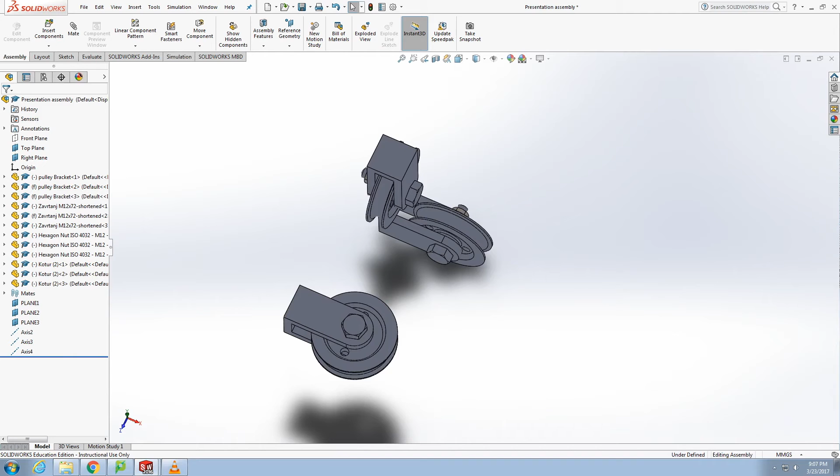This is the assembly so far: 3 pulleys set up in 3 planes. They are already aligned, but to align them, just make sure the grooves where the rope passes line up between the pulleys. To start to make a guideline for the path of the rope, click Insert Component, New Component, then

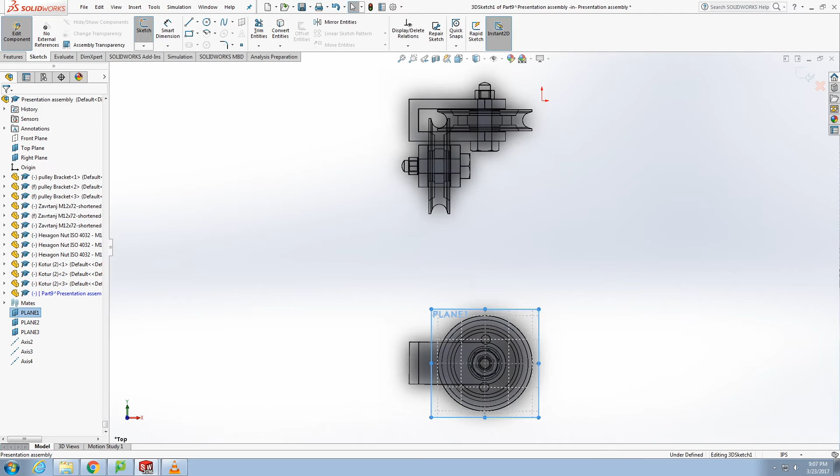select a plane. We're going to change the sketch to a 3D sketch because it's going to be a 3D guide. I already have planes set up in the center of all the pulleys. So we're going to start by drawing a circle and make the radius 48 millimeters, which will make the circumference the length of the center line down the groove of the pulley.

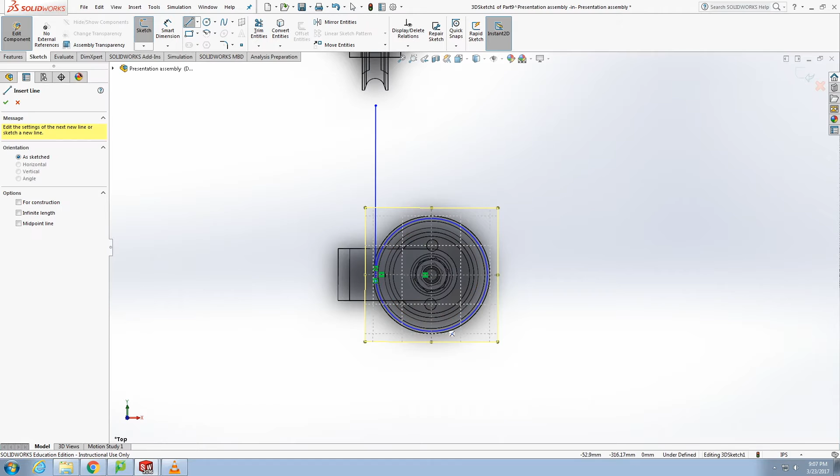Next, draw some tangent lines off the appropriate edges of the circle. Flip views and select the next plane. We're just going to repeat the steps for the 3 pulleys. When drawing the tangent lines, it doesn't really matter if they meet up because we are just using them as a guide for the rope.

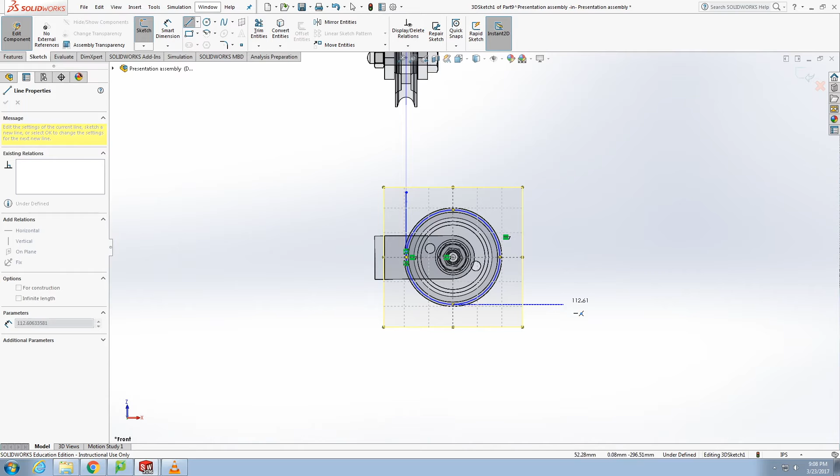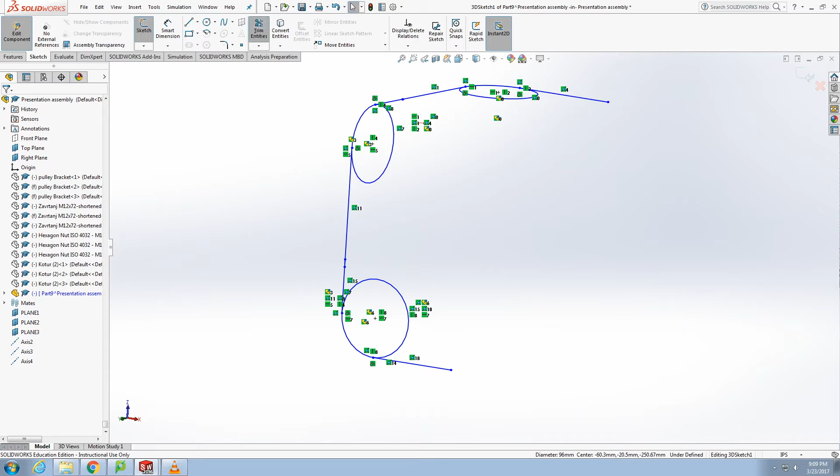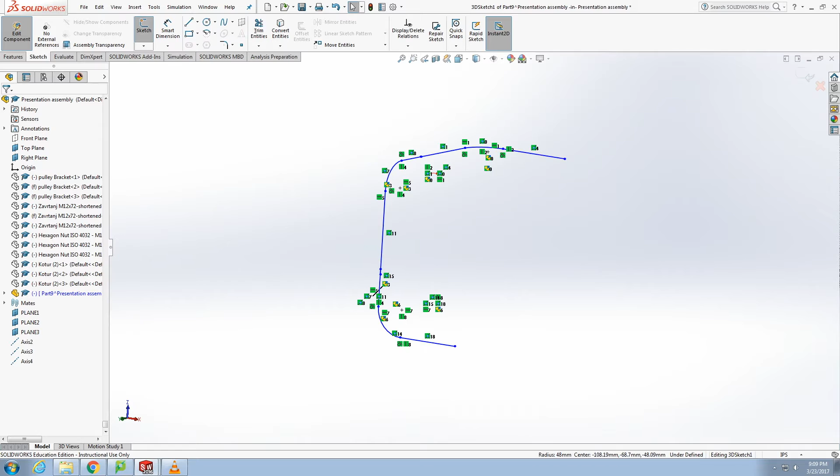Now that we're done drawing all the lines, we're going to hide the pulleys to make it easier to trim. Trim off the extra circular area that does not follow the path of the rope. Lastly, just set all the lines to construction lines.

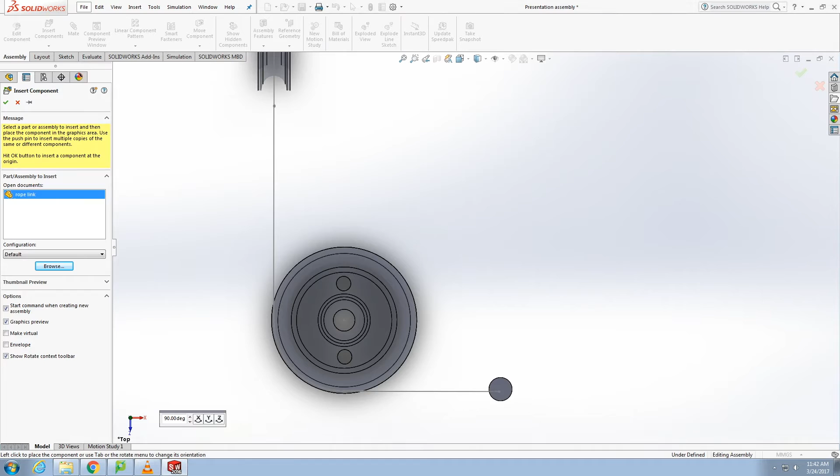Because we want to make a dynamic rope, we need to make the rope out of links. So we're going to insert component, browse for the link component, and put that on the end of the guide. Although not shown, the construction line has been fixed. We're going to mate the vertex of the link coincident with the construction line, and then make the cylinder of the link parallel with that line.

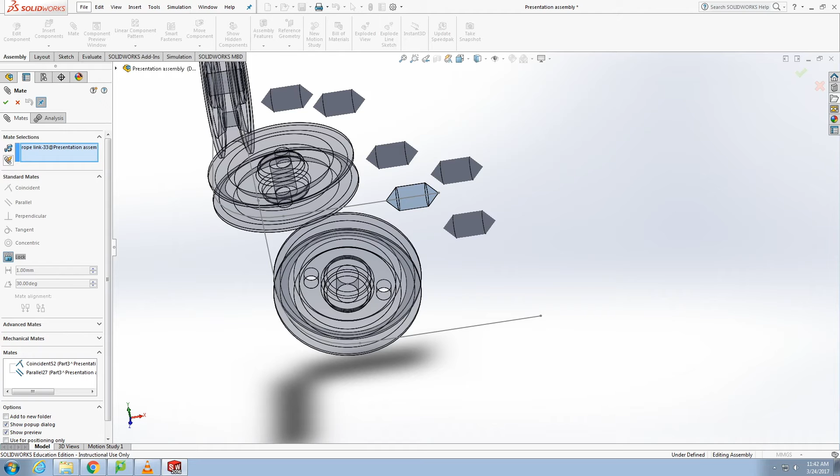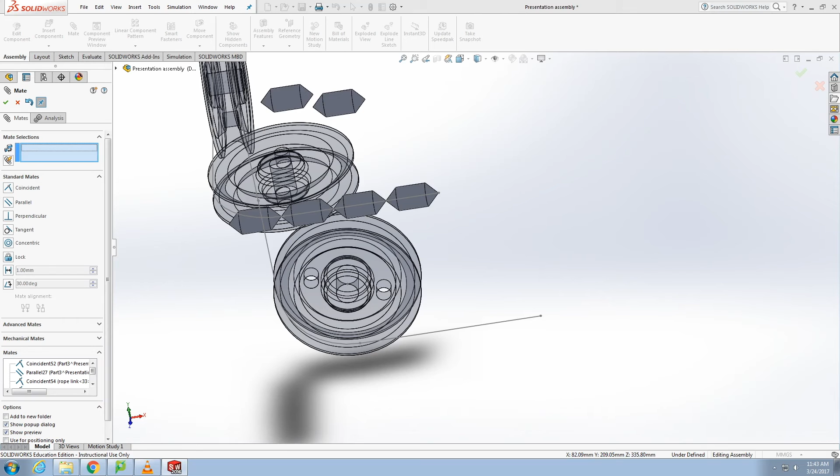Select the link to copy it, and then just paste a bunch into the assembly. The vertices between links are coincident again, and we're going to do this for as many links as it takes to follow the length of that guide path. To try and arrange the links around the path, continually fix and float them while moving other links in the right orientation.

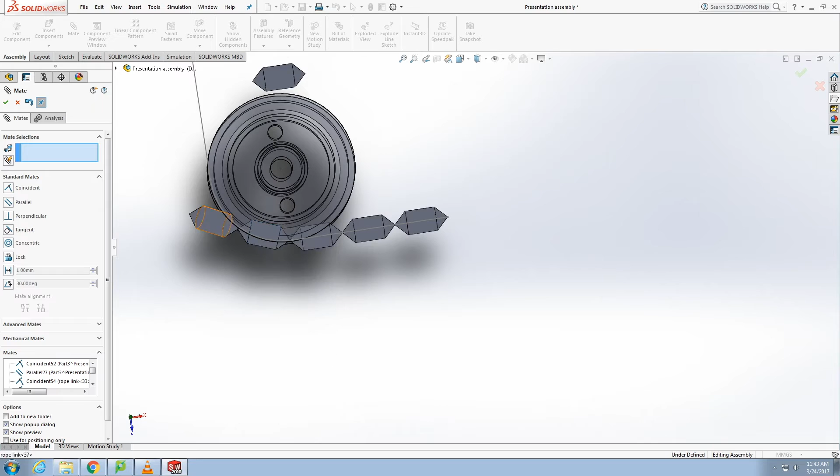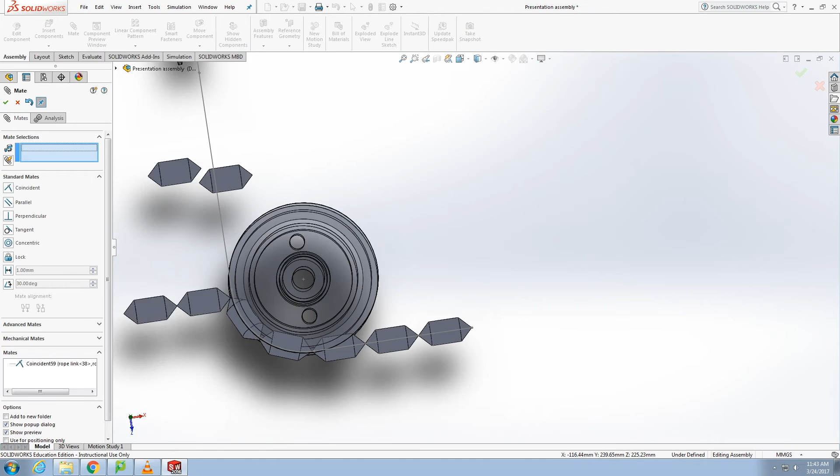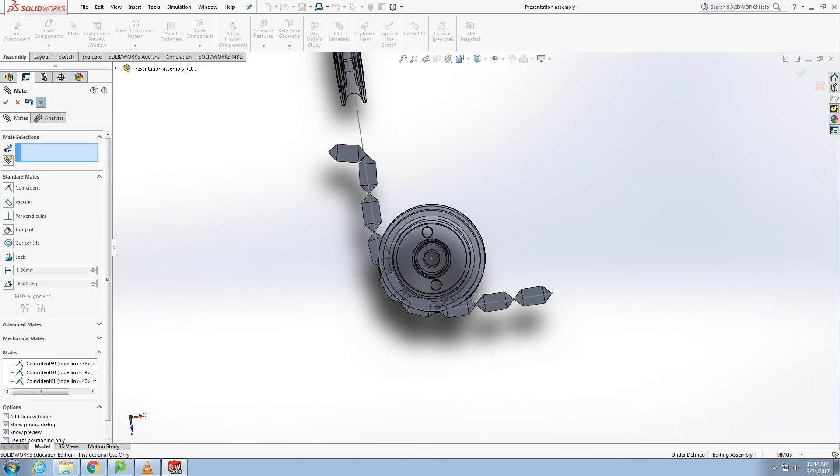Now we add a bunch more links into the assembly and assemble them in the same way to finish the length of that portion of the path. As you can see, it does not have to be perfect. Make sure none of the links are fixed before starting the mates with the pulley.

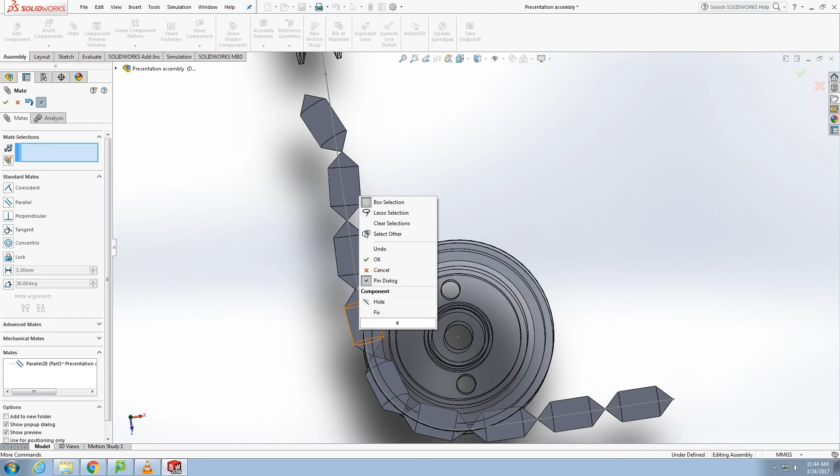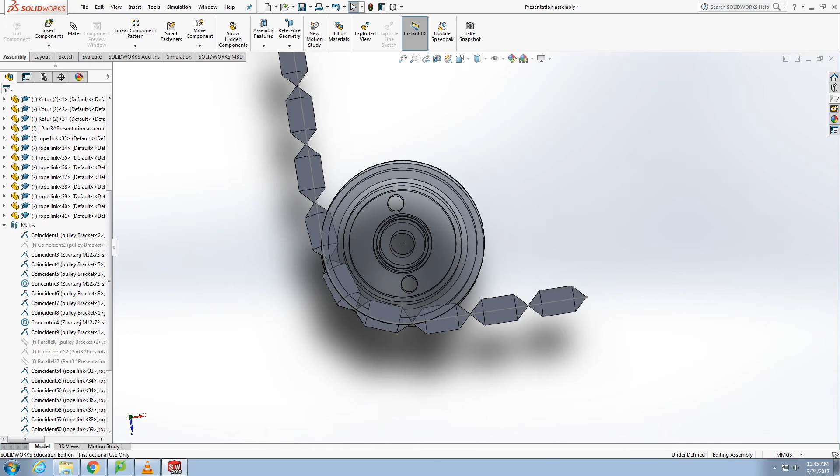To start, we're going to make the links that will remain on the straight portions of the guide parallel with those portions. Do this for all the links that will remain straight. Fix the end link and delete that coincident mate with the guideline.

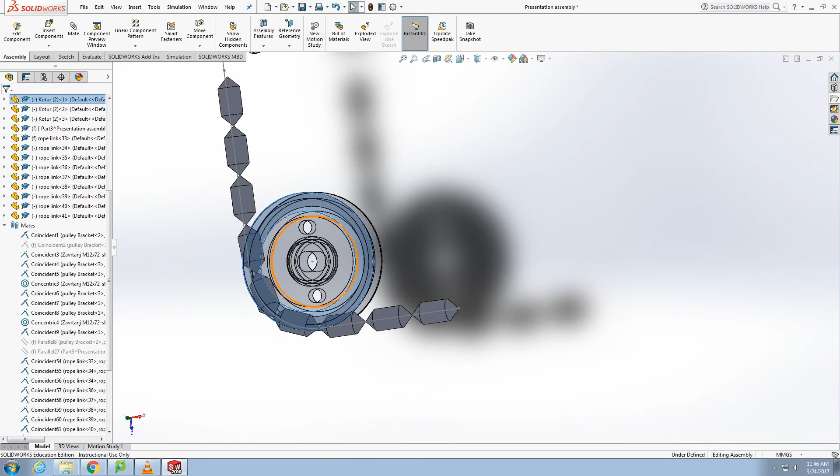Now we need to mate the links that go around the pulley with the pulley. To start, we're going to mate the cylindrical area of the links with that cylindrical area down the center of the pulley. We're going to mate it perpendicular and also add a distance between the two. It's going to be 32 millimeters, which is that 48 millimeter radius of the center line around the pulley groove minus half the width of the rope links minus half the width of that cylindrical component down the center of the pulley.

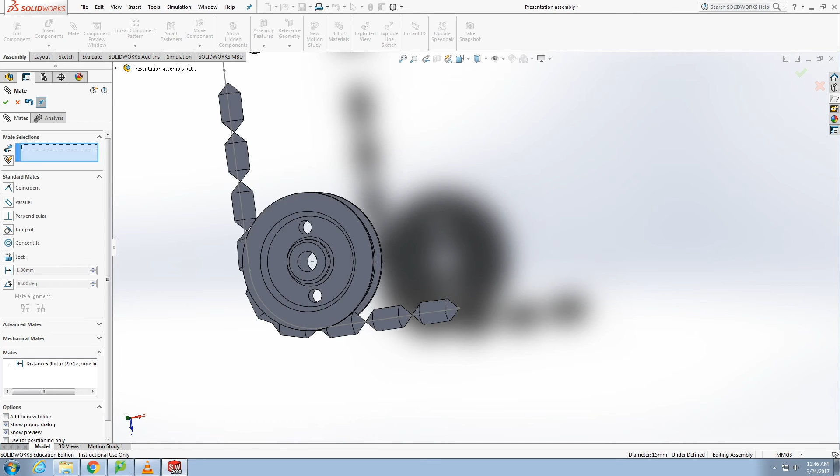Looking from the side, you can see that the links do not fully follow that guide path. It's an easy fix. We're just going to fix one of the links that is on the path. It's going to over-define it, but don't worry because it's only temporary. Then move the links onto the path and then float it again.

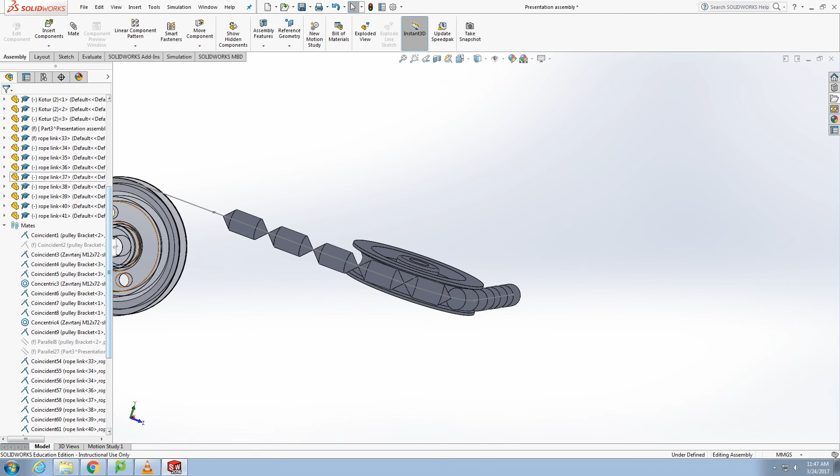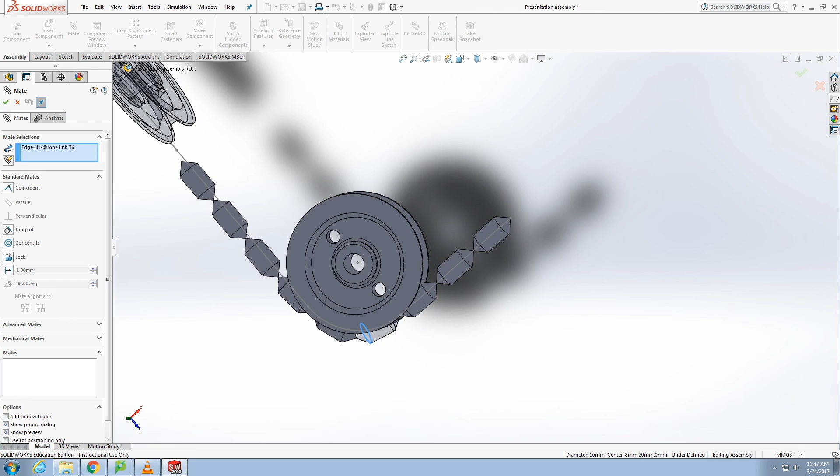The next thing we need to do is create a mate to pair the movement of the rope with the movement of the pulley. So we're going to select one of the edges that is going to be constantly in contact with the groove of the pulley, and then we're just going to lock it to that groove. This is also going to over-define it, so we just need to go back through the mates and delete the other mates that are associated with that link in the pulley.

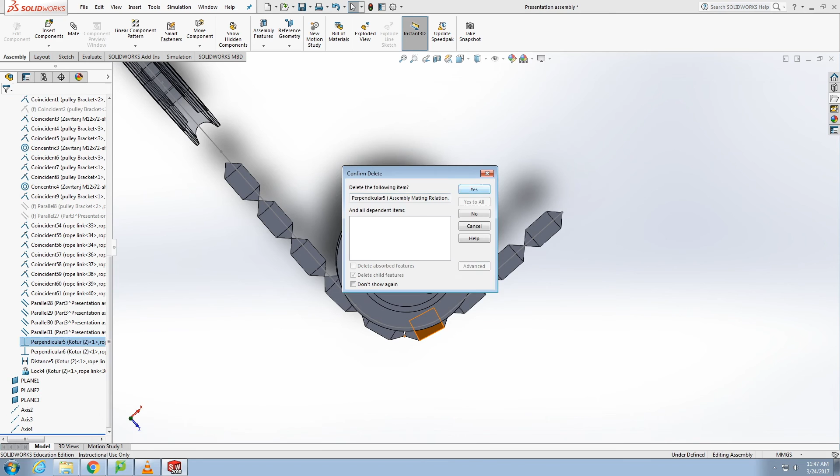So after deleting that second mate, some more problems arise. So after giving a quick scan through the mates that aren't working, we realize that we just need to float that end link that we fixed previously. Now you should be good to go, so gently pulling on either end will rotate the pulley as well as move that dynamic rope around it.

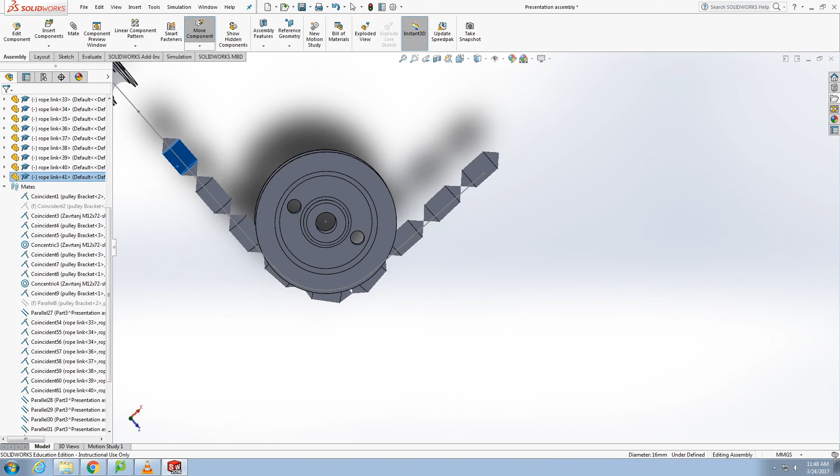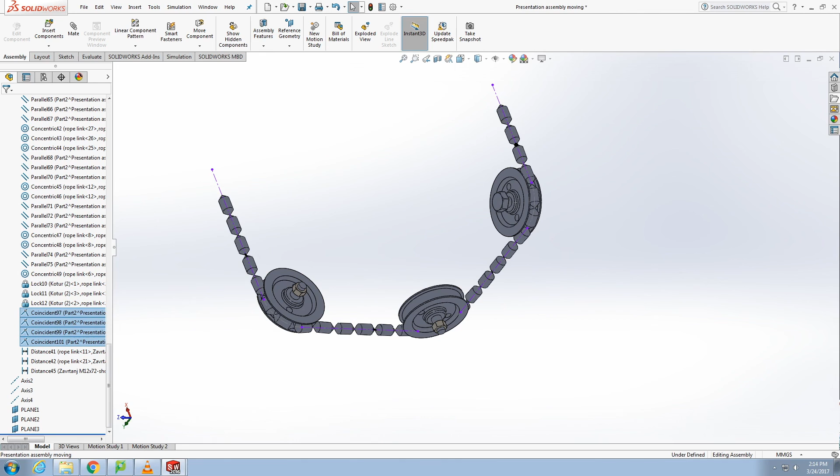So after adding all the mates to link up the 3 pulleys in the assembly, I'll show you the mates that worked for creating this dynamic rope system. So these are links locked to the pulleys. The next 4 mates in the list are coincident mates between vertices of links on the straight portions of the guide and the guideline to keep their motion on the line.

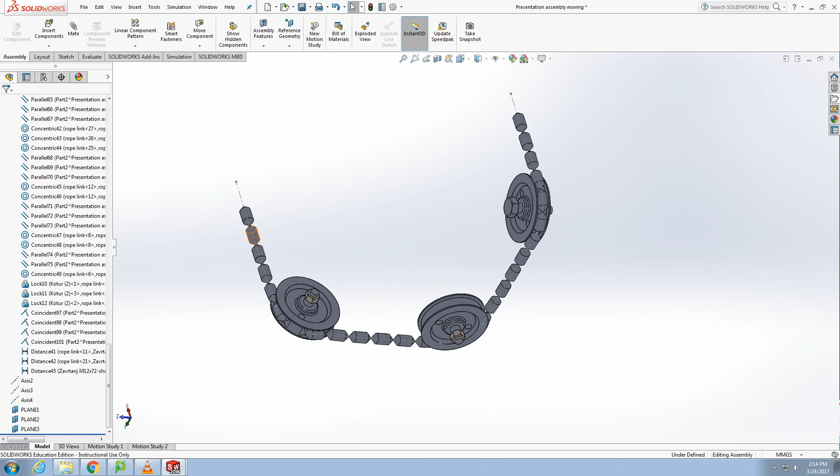And then the next 3 are distance mates, again at that 32 millimeters between the center and the links. And then all of the links along the straight portions of the guide have been set parallel to the guide, and their circular edges have been set concentric with one another. And then pulling gently on one end shows movement along all 3 pulleys.